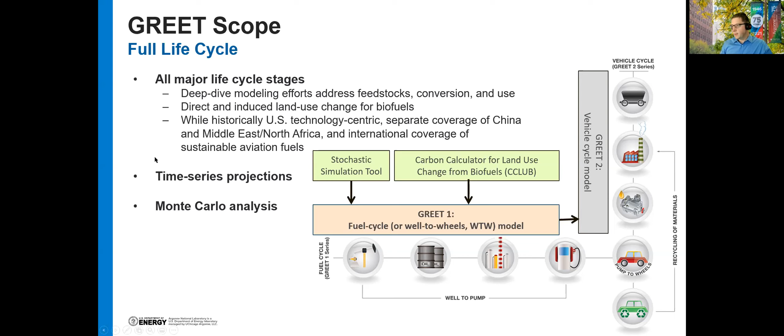I'll also say, I believe in all of these sectors, we're active looking at both fuel technologies as well as fuel cells and battery electric technologies.

This slide focuses on the metrics that are tracked in GREET. So we have four main areas: greenhouse gases, criteria air pollutants, energy use, and water consumption. And within each of those, you can see the individual flows that are tracked. I think many people will be familiar with these.

We characterize greenhouse gas emissions using global warming potential, which is established by the Intergovernmental Panel on Climate Change in their AR5 report. For criteria air pollutant emissions, the exposure matters, and so we track and distinguish between urban and non-urban emissions.

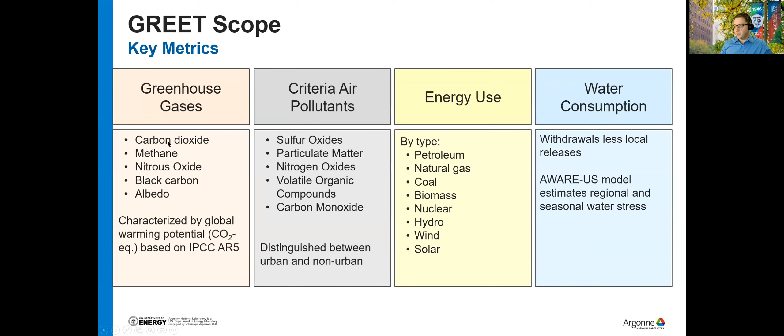Now, just a few words about the impact of GREET. GREET has a large, global, and diverse user base. You can see on the upper left here the registered users, and at this point we have over 50,000 registered users of GREET. And as you can see, this continues to increase.

The distribution of those users, we have globally, most of those are in North America, but significant numbers of users in Asia, Europe, and then other regions, which you can see there. And then you can see we have about half of our users are from academia and education, and the other half of users are from across industry, research institutions, government agencies, private consulting, and nonprofit groups.

And then the logos here show a group of various sponsors and users of the GREET model. This isn't fully inclusive, but just to give a flavor of some of the different organizations that are involved in our work.

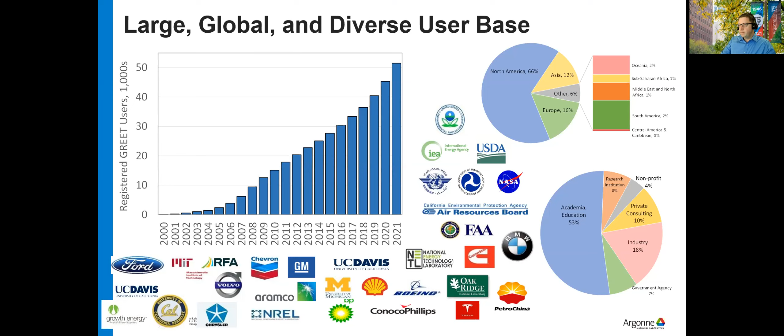One of the things that we take a lot of pride in is that GREET is used to inform policies and regulation. One of the most significant uses of GREET is California GREET, which is an adaptation of Argonne's GREET model by the state of California for use in its low carbon fuels standard for the evaluation of the carbon intensity of fuels evaluated under that standard.

Other states also have similar programs, Oregon and Washington, and they also use adaptations of Argonne's GREET model for their evaluations, following what California does.

The U.S. Environmental Protection Agency uses GREET together with other sources for its renewable fuel standard pathway evaluations. We recently contributed to the biofuels report to Congress through the EPA.

The National Highway Traffic Safety Administration is using GREET for fuel economy regulation. You'll hear more later in the presentation about our use of GREET to support the Federal Aviation Administration and the International Civil Aviation Organization to evaluate aviation fuel pathways.

GREET was used to produce the Well to Wheels report for the U.S. Drive initiative. It's being used by the U.S. Maritime Administration, first for looking at low sulfur alternatives, biofuels as low sulfur alternatives, now focusing more on IMO greenhouse gas intensity regulations and inland vessels.

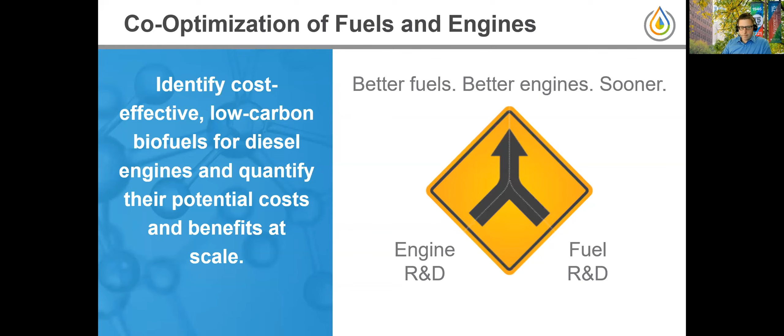Within the consortium, Argonne leads the analysis team, and the analysis team is looking at costs and benefits across scales. One of the things we're doing is looking at the cost, greenhouse gas emissions, and other environmental effects of biofuels. We've done this for light-duty vehicles and then heavy-duty vehicles. Here in the presentation today, I'll focus on our work on heavy-duty vehicles.

We've looked at the value that diesel-like biofuels could provide the refining industry by analyzing integrating bio blend stocks into refinery operations, and doing that both from an economic and environmental perspective. We've also looked at...

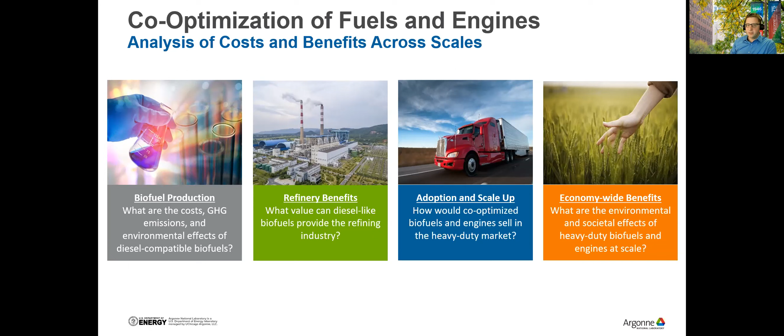consumer preferences and choice of purchasing co-optimized engines and biofuels using adoption modeling and scale-up modeling. So we've used a series of different models at the National Renewable Energy Lab and Argonne for that work. And then ultimately looking at the economy-wide benefits in terms of environmental benefits, economic benefits, job benefits of biofuels at scale.

So here's one of our outputs from the life cycle analysis and techno-economic analysis portion of the work. Here it was Argonne primarily doing the life cycle analysis, and the National Renewable Energy Lab and the Pacific Northwest National Lab doing the techno-economic analysis.

On the screen you can see the figure on the left is the life cycle greenhouse gas emissions for the fuels that we analyzed, and the figure on the right is the minimum fuel selling price, or the result of the techno-economic analysis.

You can see the list of bio blend stocks on the left, and you can see we analyzed a large number of different molecules that could be used as fuel additives. These are meant to be performance enhancing. They should reduce the NOx and PM emissions from heavy-duty vehicles, which is a major concern for meeting future more stringent emissions regulations.

These were screening level assessments, and that's the reason why we've left the numeric results off for the minimum fuel selling price, rather to show a range. But here you can see the contributions to each of these.

What we see is that many of the experimental researchers going into this program had the perception that any biofuel would be low greenhouse gas emissions. And it turns out that's not necessarily the case. There was a lot of interaction between members of the research team to down-select the key fuels, but this is shown in these results that show a wide range of greenhouse gas emissions across these fuels.

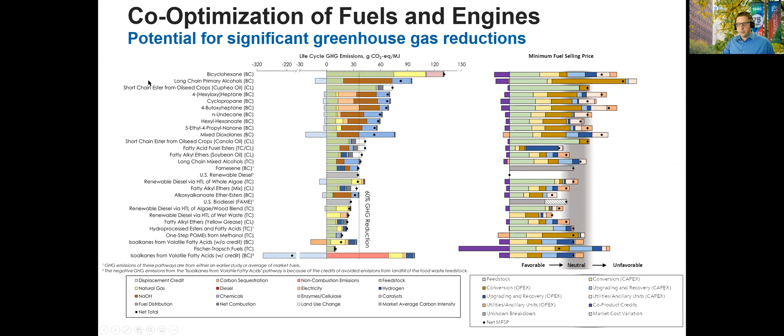And a key challenge is reducing the cost. You can see even across the whole range, we have a range of costs. But generally, good news is that the lower greenhouse gas emission fuels, some of them tend to be the lower cost options as well.

All right, next here I'm going to move into another area of our work. This project is one that we have with four national labs: Argonne, Oak Ridge National Lab, Pacific Northwest National Lab, and the National Renewable Energy Lab. This is looking at opportunities for biofuels for maritime shipping.

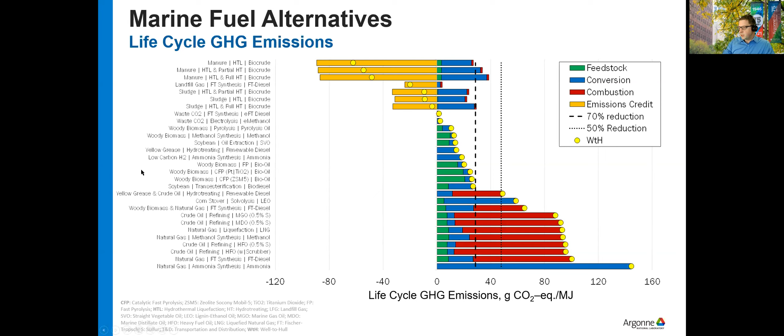A caveat here is we haven't - there's ideas to use carbon capture, but the challenge with the fossil fuels is that the carbon that's emitted is contributing to global warming potential.

One more slide here on marine fuel pathways. So this slide, we've looked at the greenhouse gas emissions and the minimum fuel selling price together. And just, in the interest of time, I'll go real quickly. The different colors here represent different pathways for producing these fuels.

And we can see that the black is the fossil pathways, and the lower end of the cost for the black dots are - we can see low sulfur fuel oil, LSFO. So that's kind of the benchmark, at 1 and 1 for these ratios.

And so anything to the left of that, all of the fuels are to the left of that, they have lower greenhouse gas emissions. And then anything below that has a lower price. So we do see HTL of manure and sludge potentially could have a lower price. And then we see other biofuels and waste-based fuels that could have lower greenhouse gas emissions with an additional cost.

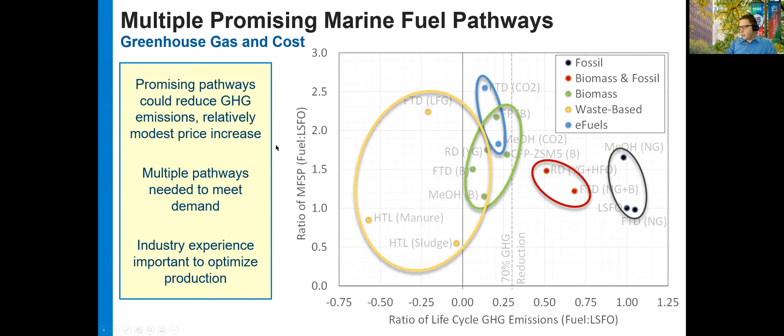And the feedstocks that are used to produce these fuels are limited, so multiple pathways would be needed to meet the total demand. And as these things scale up and we gain industry experience, we expect that production can become more optimized and these prices would then fall.

The last area I'm going to talk about here is our AWARE US model. And this is addressing the question: how can we maintain water sustainability while scaling up energy production?

So we used a method that was actually first developed elsewhere and adapted it for our purposes in the US by developing characterization factors for county level water impact analysis. We started this work by developing county level factors, and then you can see the map changing here. We realized that throughout the year, the water stress would change, so we developed those on a monthly basis and then used those to analyze different systems.

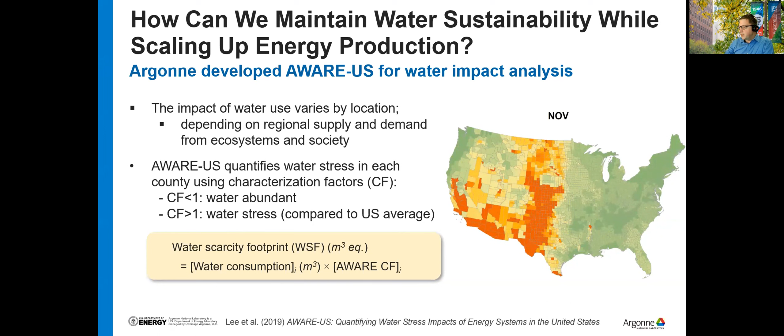The one I'll talk about today is algae. So I'll go to the next slide here. We're using AWARE US to guide development of algal biofuel systems.

This grew out of our analysis of water consumption, and we realized that wasn't sufficient because of these regional differences in water stress. So you can see here, this was looking at where would be suitable locations for siting algal biofuel systems.

And some of the background is that the southern US is more suitable. It has more sun and warmer weather. You don't lose productivity in the winter months as much as you would further north.

But you have some regions with extreme water stress, and you can see the color coding there. The red counties are those with much higher water stress, and there's a number of those in Arizona, Texas, New Mexico, which could otherwise be very suitable locations for algae production. But because of the high evaporation of water from algae ponds, those could end up causing significant water stress.

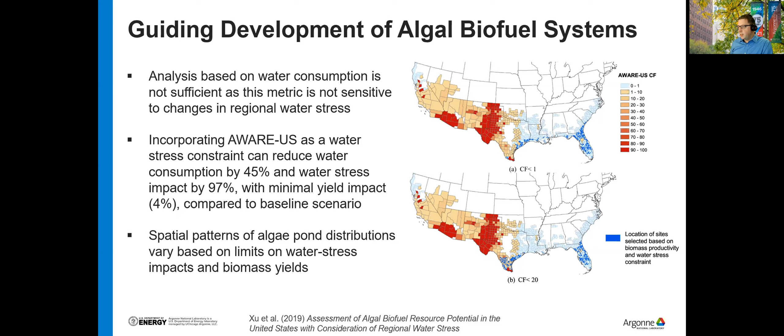Let me go to the next slide. The last thing I'll talk about here: algae ponds require a CO2 source, and the system we're looking at has an industrial CO2 source. That could be something like coal power, but it could also be high purity CO2 sources, such as those from steam methane reforming, ammonia production, or ethanol production, which produce CO2 at a very high concentration that can be compressed and delivered to the pond almost directly without cleanup and at a much lower cost.

So here we looked at algae production in different states, focusing on the differences in high purity CO2 availability. The Gulf Coast in Louisiana, the industrial center there, has a lot of ammonia production and a lot of steam methane reforming, so there's a lot of high purity CO2 which could be used to produce algae, and that would happen at a very low carbon intensity.

As you can see in these figures, the most favorable algae production location that we found would be Florida, apart from the lack of high purity CO2 available there. So considering the availability of high purity CO2, Louisiana and the Texas Gulf Coast look very good.

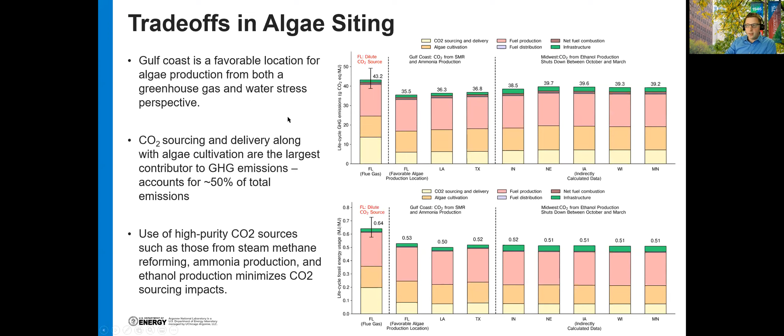So that just gives you a flavor of some of the kinds of work that we're doing. There's actually much more going on within our center, but time is limited today. So I want to turn it over to Wee-Sung next, who will spend some more time talking about our work on sustainable aviation fuels. Thank you, Troy.

So yeah, my name is Wee-Sung Lee. I work with Troy at Argonne National Labs Systems Assessment Center. So today, as Troy explained about the system boundary and what we do here at Argonne, I'd like to specifically focus on the life cycle analysis of sustainable aviation fuels, which is a very hot topic in this area. So I'd like to give you a brief introduction about this area.

So greenhouse gas emissions became a very important metric in the aviation sector. When I tried to search a flight from, for example, Chicago to Houston, planning for attending this webinar, I searched it through Google Flights based on my time availability and the price. Now you may see there's one more section: the GHG emission, presented here in terms of kilograms of CO2 for each option.

So as you may see there, some options may have lower emissions and some higher emissions. So there are many options that we can choose. In this example, you may see the higher emissions, but there will also be low carbon emission options too. So it's not only about the price or the time anymore—now people consider the emission as one of the metrics in choosing their flights.

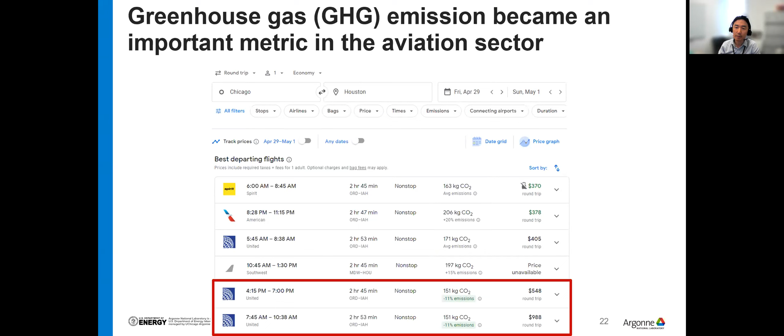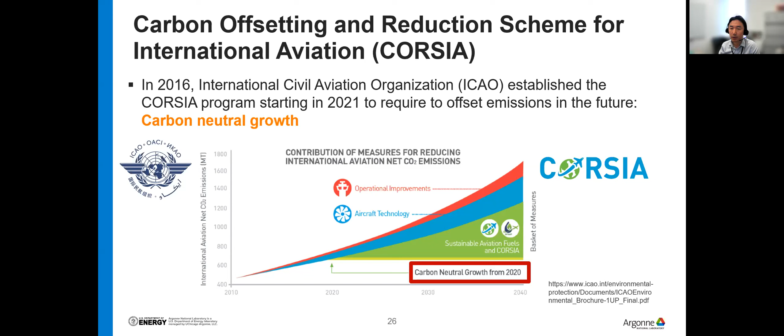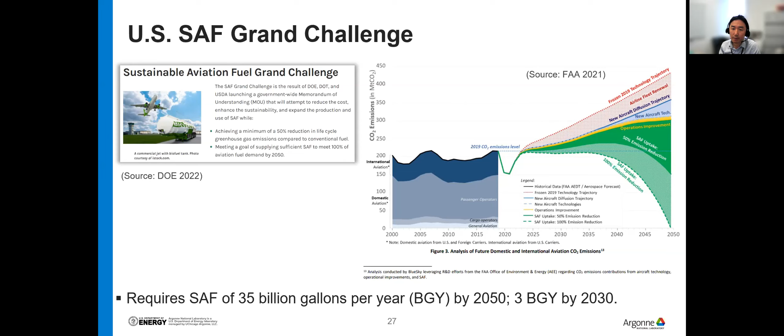I mentioned emission reduction, and LCA would be a major part of the emission reduction calculation. You may assume that if I burn fossil fuels or biofuels like SAF, the emission would be similar from the aircraft. But life cycle analysis considers the difference between fossil LCA and SAF LCA in terms of the system boundary. Biofuels like SAF can have emission reduction benefits because we consider the life cycle basis.

SAF programs internationally, federally, or at the state level take LCA as the key tool to evaluate emissions and emission reductions through sustainable aviation fuel. The international ICAO's CORSIA uses LCA, and at the federal level, US EPA's RFS Renewable Fuel Standard uses LCA. Other states like California, Oregon, and Washington also have programs supporting biofuel or SAF activities through LCA. So life cycle analysis will be the key factor in analyzing greenhouse gas emissions and emission reductions compared to fossil fuels.

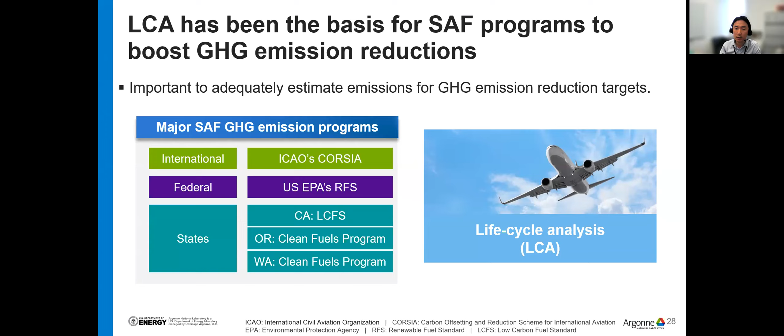So I will talk about the little more details, how we analyze the emissions of the petroleum fuels and how we analyze the emissions from the sustainable aviation fuels. LCA, Troy explained the general LCA framework. We have the fuel cycle and the vehicle cycle. But for the aviation sector, we mainly focus on the fuel cycle, meaning for the petroleum fuels, not just about the jet fuel combustion from the aircraft, we also consider the other life cycle stages starting from the crude oil production. On the far left-hand side, you will see the crude oil will be recovered and transported, and we have the refineries to convert the crude oil into the jet fuel and other fuel types, and we eventually combust it. So from all stages, we have emissions, and those are all combined together in terms of gram of CO2 per megajoule of fuels.

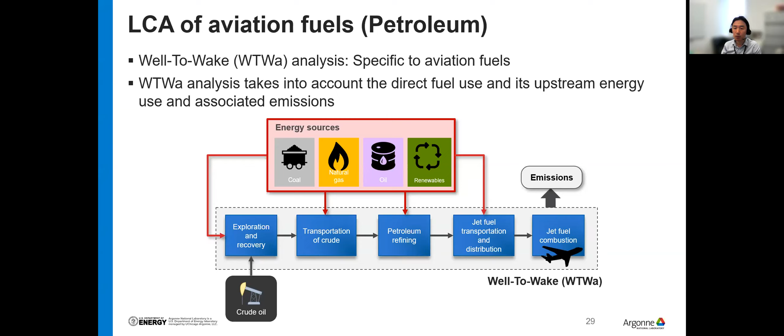We not only focus on the emissions from each stage, we also consider, for example, if I use natural gas for petroleum refining, then I also track all the way to the natural gas production and natural gas transmission to the petroleum refining process, so that all the life cycle stages of the input materials will also be covered. So it's a very comprehensive and thorough analysis. Everything will be calculated in terms of the gram of CO2 per megajoule, so that different systems could be compared to each other.

Similarly, when we consider the sustainable aviation fuels, we have the emissions from the fuel use on the far right-hand side. The aviation sector may have emissions from the combustion. We also considered all the conversion processes. This example is soybean to SAF, through the hydro processing, which is typically called HEFA processing after oil extraction.

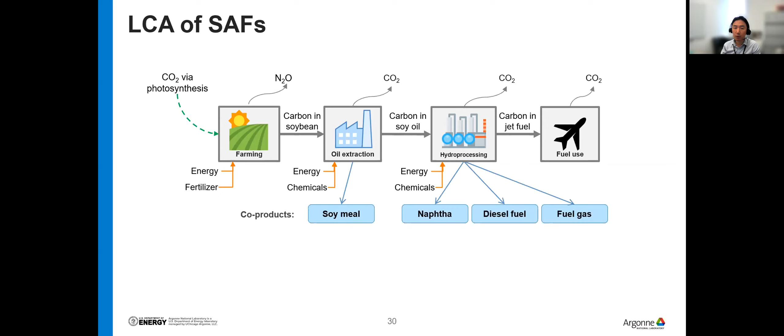But at the very left-hand side, from the beginning, we consider the soybean farming. We start from the farming, and then farming requires energy and fertilizer, the chemicals. Once we use, for example, nitrogen fertilizer for soybean farming, we also track back how the fertilizer will be produced. And if we use diesel fuel for farming, then we track back how much energy and emissions will be associated with that amount of diesel used in the farming. So again, we consider all the life cycle stages to calculate everything in terms of the gram of CO2 per megajoule.

But the main factor in SAF is the carbon cycle via photosynthesis. The carbon in soybean and carbon in soybean derived fuels actually came from the CO2 from the atmosphere. So the carbon absorbed from the atmosphere during the biomass growth could offset the carbon emitted during the fuel combustion, because the carbon comes from the atmosphere. So it's carbon neutral. That's why sustainable aviation fuel typically has relatively lower carbon emissions compared to fossil fuels.

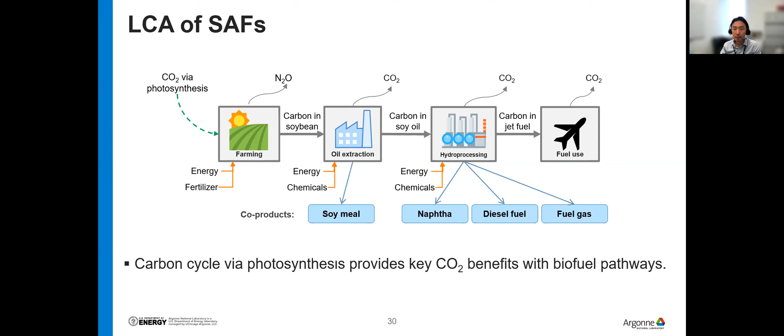So GREET provided the carbon intensity values. The carbon intensity is another term for the same thing, the life cycle greenhouse gas emissions. The carbon intensity tends to be presented in terms of the gram of CO2 per megajoule. Argonne participated in ICAO's fuel task group, where we developed the carbon intensity values for the CORSIA program. As you may see on the left-hand side, there are many fuel production options from various feedstocks like agricultural residue or forestry residue with FT, that's the fuel conversion process.

Or we can use a different fuel conversion using a different feedstock, like the second one would be tallow or used cooking oil converted into SAF using the HEFA process, for example. Argonne supported ICAO's CORSIA using Argonne's GREET model, and the default LCA values will be available in the CORSIA document. On the left-hand side figure, there's a red dashed line, that's the petroleum jet fuel baseline, which is 89 grams of CO2 per megajoule. So LCA value of the petroleum jet fuel is 89, and other SAF production options, as you may see, some may be very close to zero, like 7 or 8, and some may be higher, but those are relatively lower than the petroleum jet fuel baseline, meaning the difference between the fossil and the SAF would be considered the emission reduction, which could be a major part for the CORSIA program.

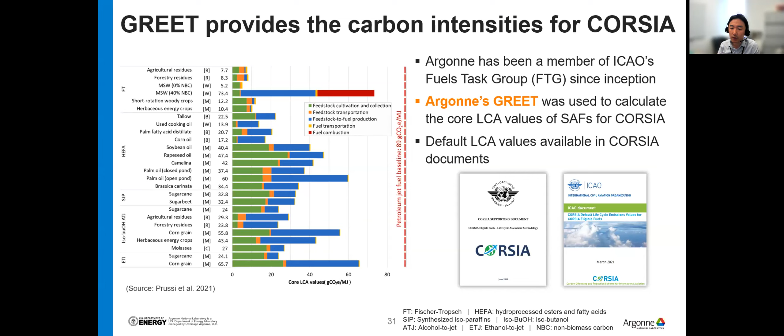I mentioned about the GREET model, and we have the GREET, like the very large file with a lot of data sets and with extensive pathway list of the pathways. We recently split the aviation part to give a more interactive, user-friendly interface so that people can test multiple feedstock and conversion pathways.

They can see the results right away. I can just show you a quick overview of this module so that if you're interested in checking the results, you don't need to understand all the details, but you can quickly check the results.

On the left-hand side, you may be able to select the feedstock and conversion types and the data sources. Then the table on the right-hand side shows all the inputs used for this calculation.

You may use the user-defined values, or if you change the numbers, the results will be updated right away. So it's an interactive module. In LCA, co-product handling is very important, and we also have this feature here.

On the right-hand side, you will see many environmental metrics, like energy use or greenhouse gas emissions, and the results are presented for the upstream and on-site emissions, with each contribution shown on the right-hand side.

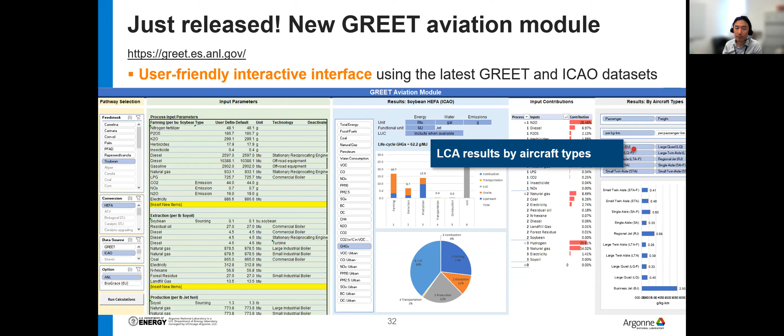The benefit of having this module is that we can have a very consistent data structure, and again, it's very user-friendly. Whoever wants to check can see the results and the impact of changing parameters right away. Most importantly, we use very reliable data, mainly two sources, GREET and the ICAO CORSIA program. This module can be used by stakeholders or other researchers to verify and improve their carbon intensity values.

So meaning if I have carbon intensity values with a 50% reduction compared to fossil, but if I want to reduce further, they can change their parameters to reflect the additional emission reductions.

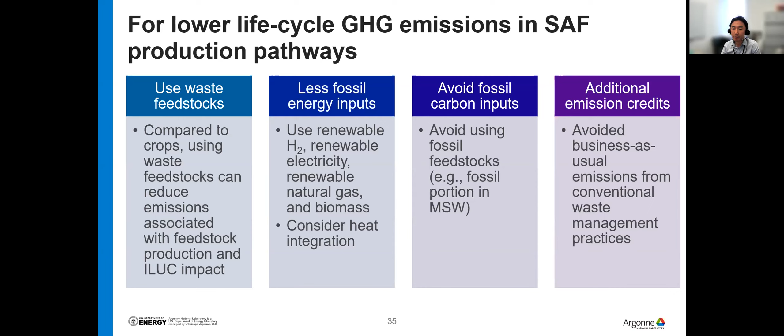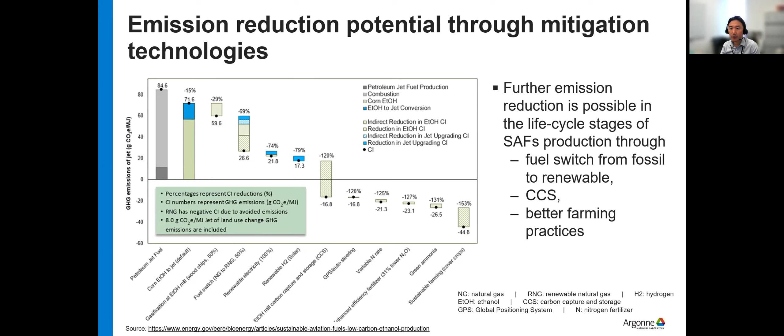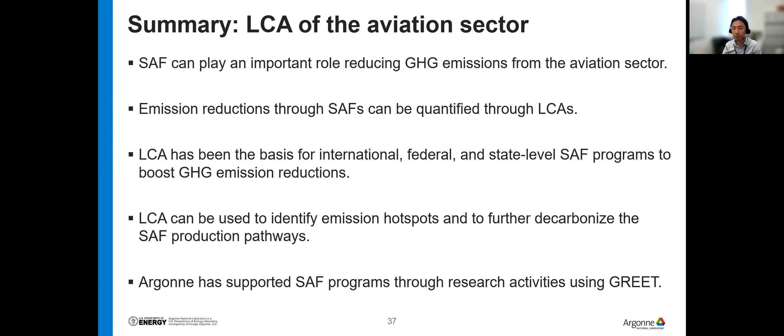Hi, thanks. I'm Jarod Kelly. Today I'll be shifting gears a little bit, moving away from fuels and into the battery space. I'll be talking about the impacts of battery electric vehicles, with a little bit of discussion on implications for grid resilience. Next slide, please.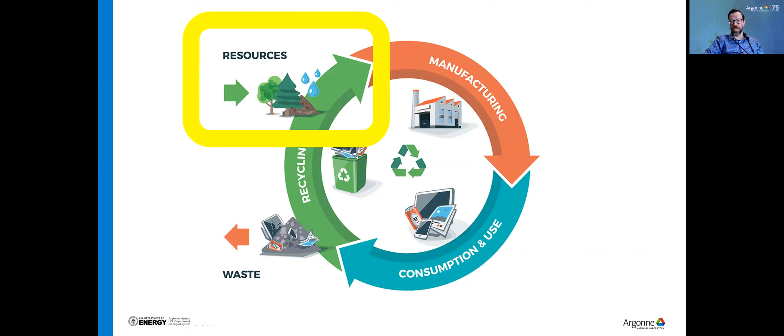To do that, we break the GREET model into two pieces, like we talked about: the GREET 1 model and the GREET 2 model. The GREET 2 model focuses on aspects of vehicle production, all the stages of producing a vehicle. I like to say the GREET model tells us all the energy and materials associated with producing all the energy and materials that we use. So we have raw material extraction, material processing, vehicle component production, vehicle assembly, and then we get to the end of life—that's disposal, recycling, and those stages. Next slide, please.

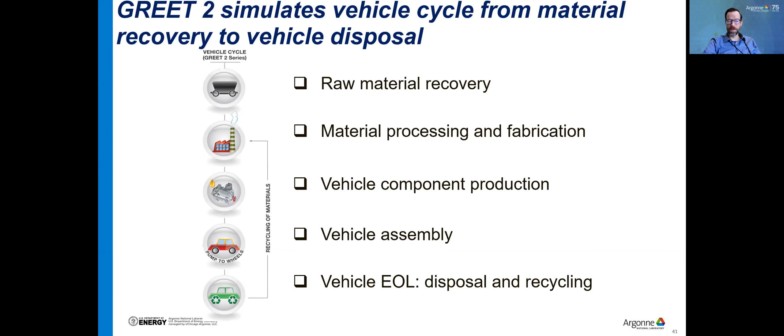We're supported by a number of different programs within the Department of Energy, which help us understand the various materials that go into vehicles. There are many different types of materials that go into vehicles, and many different types that go into batteries. So we capture all the different materials, what they're made of, and what's associated with producing them. That gives us an idea of the supply chain impacts associated with material production. We carry that forward into battery component and battery pack modeling.

That includes things like chemistry, processes, bill of materials, lifetime, and location, which helps us understand the supply chain impacts associated with battery production. We carry that forward into electric vehicle modeling, where we have the vehicle characteristics, usage rates, and cradle to grave—that's what we mean by C to G—possible second life, and possible end of life impacts. That gives us a total perspective of electric vehicle use, production, and end of life. Next slide, please.

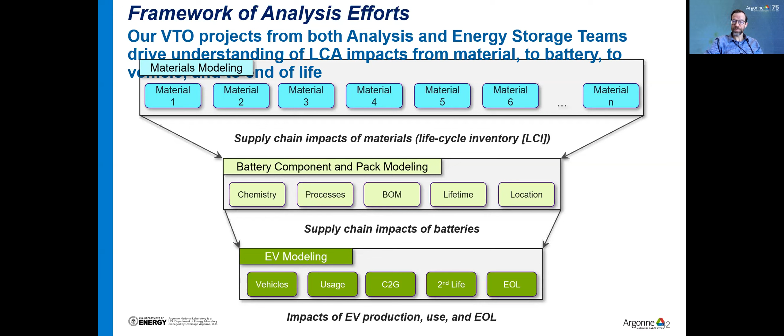So if we drill down on just one material here, we have this effort from most of the materials within the GREET model that we cover. Drilling down onto just the LCA inventory analysis associated with production of lithium, we have lithium from a couple different assets. We can think of brine-based lithium coming out of South America, or lithium from an ore process, spodumene, coming out of Australia. We go from material recovery, concentration, transport stages, conversion to lithium chemicals, lithium carbonate, lithium hydroxide, additional transport stages towards cell production.

So the battery is comprised of a cell, and we should actually have a cathode stage here as well. There should be a cathode production stage prior to cell production. And then we have cell production, transport, module production, potentially transport, pack production, potentially transport, et cetera, until it gets into the electric vehicle itself and is used.

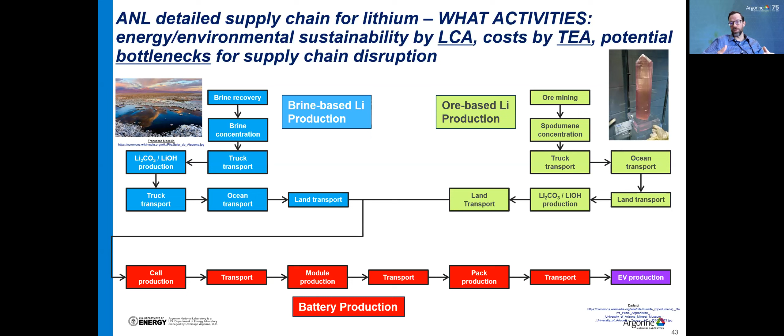So the battery electric vehicle contains a battery, and that battery is comprised of many different materials. This is just showing us what the battery looks like. We can see there's an anode current collector and a cathode current collector, which are going to be your copper and aluminum. Then we have the anode itself, typically graphite with a binder, which can also have silicon doping or silicon components, potentially lithium metal for future considerations. There's a separator, and then there's the cathode material.

The cathode material is what a lot of folks are considering at this point in time. That's going to be your LFP, lithium iron phosphate, your NMC, lithium nickel manganese cobalt cathodes, and your NCA. NCA is typically what Tesla is mostly using in their vehicles, but they are putting LFP in different vehicles in different parts of the world.

So there's a lot of different components associated with the battery, and a lot of different materials that go into those components. We cover all of that. We try to be exhaustive as best as possible, and we consider those here. Next slide, please.

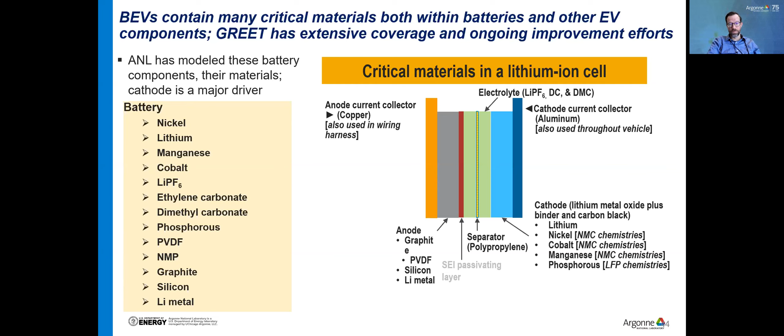So the next stage that we would think about then is manufacturing, making the battery itself. Next slide.

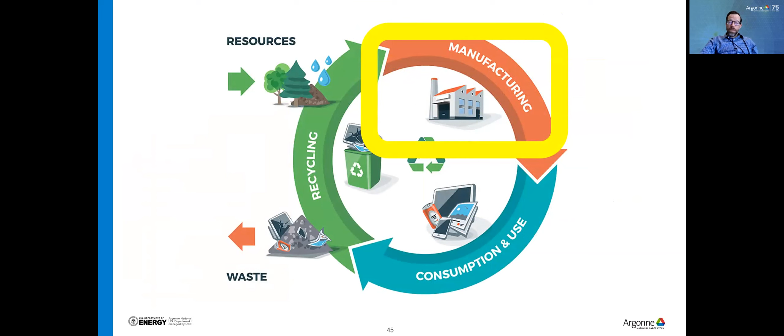For that kind of coverage, I was talking about what a battery is made of, but there's also, in addition to all these different materials and stages of production, the assembly stage. The assembly stage is energetically intensive because you basically have to have dry room conditions, and that means it doesn't scale linearly. So the more modules or battery cells you can produce in one location, the better. It's basically a big capital expense if you think about it that way.

And we carry this through also to stages of recycling and disposal, as we can see here. A couple of different recycling stages considered: pyrometallurgical, hydrometallurgical, and direct. I'll talk about those a little bit later. But this is showing the comprehensive coverage that this model has, and it's informed by another Argonne model called BatPac, which is focused on modeling the characteristics of different batteries. So that's how we inform all of our modeling, informed by the other good models at Argonne and other information we can find elsewhere.

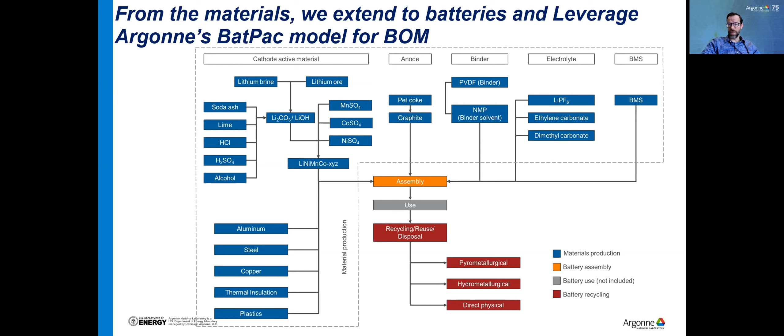Next slide, please. There seems to be a fair amount of complications with merging our different slides together.

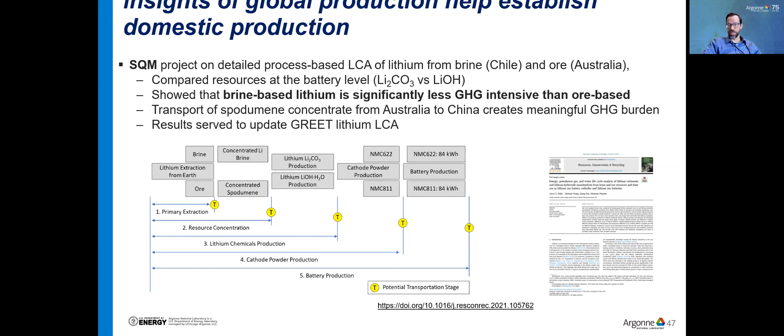So when we think about these different batteries, one of the things I mentioned was we have different cathodes. Cathodes are where a lot of the activity is occurring in trying to change battery density. Obviously energy density is really important because that allows you to basically extend your range for the same weight of material or weight of a battery.

So what this is showing is the bill of materials associated with the NMC variants. For those unfamiliar, this is stoichiometric relationships of nickel to manganese to cobalt. Typically we say NMC 111, 532, 622, and the numbers correlate in XYZ form to the N, the M, and the C respectively. NMC is one of the dominant chemistries on the market, so it's of great interest to folks.

So what we're showing here is essentially that as you maintain a particular energetic capacity, I believe this is for an 84 kilowatt hour battery, you see the associated weight of that battery broken down by different components, and you can see that it's lighter as you get more energy dense, which makes sense, I think, to probably everyone on the call. Next slide, please.

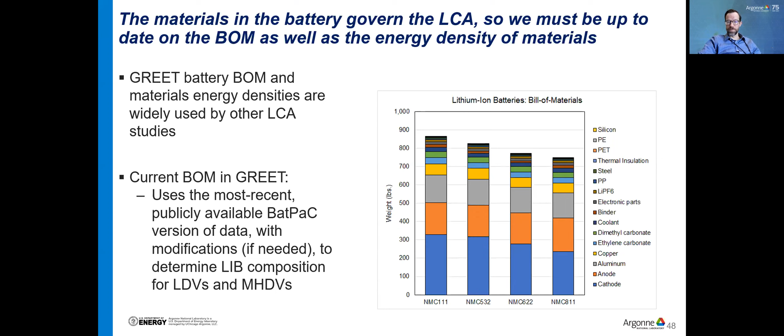One of the things we look at and are concerned about is supply chains. What does it look like if you extract these different materials from different parts of the world? Here we're showing a comparison of these different battery chemistries along with where the primary production locations would be occurring for these different materials from a greenhouse gas perspective.

If we focus on one of the blocks, the NMC 811 to the far right, looking at the US, China, Japan, Korea, and Europe, you can see that Europe in particular has the lowest greenhouse gas emissions associated with the production of the battery, followed by the US, and then Korea, Japan, and China, respectively.

That's related to a large degree to the electricity grids associated with these regions. So as we move from the NMC 111 over to the 811, as you increase energy density, you decrease greenhouse gas emissions associated with the battery generally. And then there's variance in where you produce the batteries themselves.

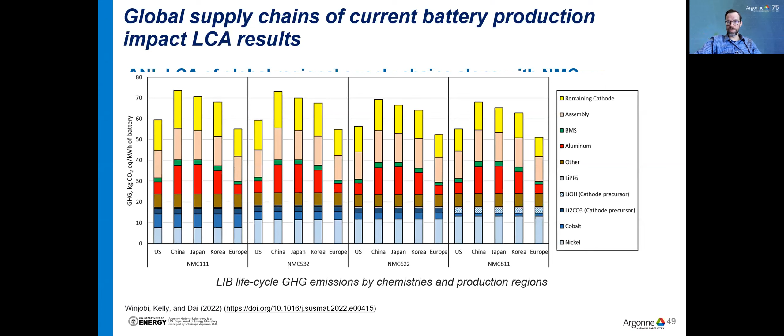Now, consumption and use.

Obviously, Troy and Yusung talked quite a bit about the upstream and the implications of producing fuels from different pathways. The same can be said for electricity. This is just an illustration of all the background information that we have on the electricity going into the grid.

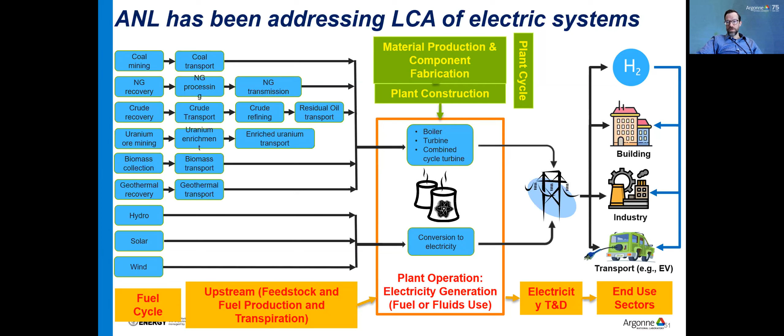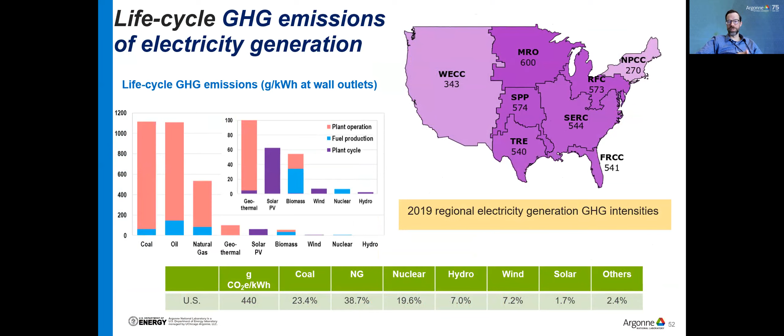This is a map of the characteristic emissions rate, greenhouse gas emissions, in different parts of the US. This is for 2019 data. We update all the time, so this is constantly representing better and better information.

We can take that information and bring it into an analysis of an electric vehicle versus a gasoline vehicle. To orient you on these slides, on the far left is a gasoline vehicle with 31 miles per gallon gasoline equivalent against an EV with a 300 mile range that has 124 miles per gallon gasoline equivalent. The bar for the EV on the far left uses the US average grid emissions as characteristic.

You can see there are different colors. The colors represent the vehicle in blue, the battery itself in yellow. In pink, that's the upstream emissions - the emissions associated with producing the energy, so electricity emissions go there. And then we have tailpipe emissions in the darker red - apologies, I'm a bit colorblind.

Now, as we move further to the right, I've characterized things for the electric vehicle by fuel and by region of the US - looking at coal, natural gas, and renewables, and different parts of the country: upper Midwest, Texas, California, and the Northeast. This is showing how these EVs would compare against a gasoline vehicle. These are comparable vehicles as modeled through the Autonomie simulation tool, so it should be a pretty apples to apples comparison in terms of the performance parameters.

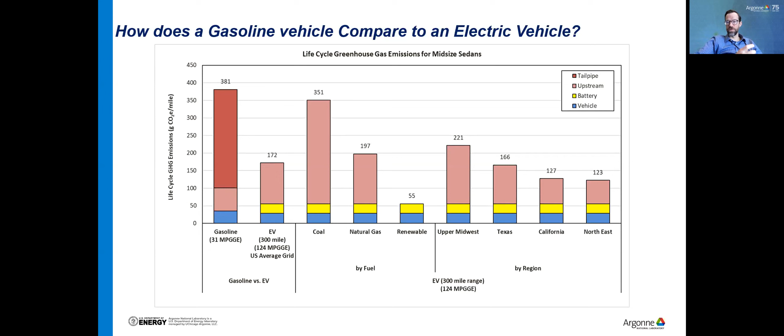So this is showing that the battery itself is a big component of the EV, right? It's a significant burden, you can see there, but that still doesn't, to a large degree, offset the benefit from the use phase.

This is looking at that in even broader context, both currently and into the future, for a variety of different vehicle types. If we focus on the plot on the right, that's showing the various current and future vehicles for gasoline, diesel, corn ethanol, hybrid vehicle, plug-in hybrid with a 50 mile range, fuel cell vehicle from different types of fuel cell, and the battery electric with 300 mile range. It's a little hard to view this one.

One thing to observe in the top portion is that we have a variety of different pathways we're considering for the future for the fuel cell vehicle and the battery electric vehicle. We're generally expecting advancements in vehicles just generally, but we can see significant potential for reductions in associated greenhouse gas emissions with vehicle electrification. Fuel cell vehicles, and even hybridization and biofuels, can yield significant greenhouse gas reductions as well.

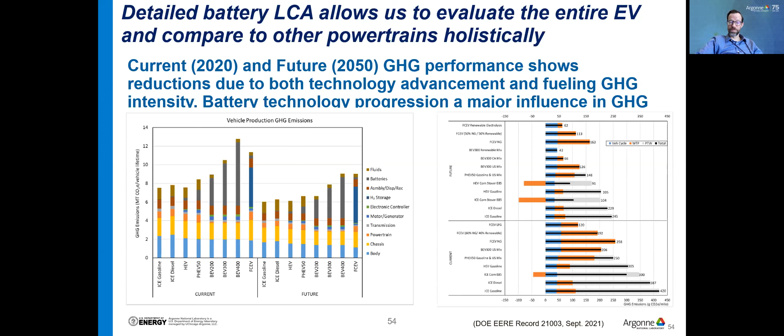So one of the conversations going on in this group, and what I was hoping to address, is—and this conversion of slides is problematic, so I'm missing some text that would be beneficial, I'll talk through it—essentially the idea that, if I'm understanding this group correctly, you're thinking about battery electric vehicles and their potential for resilience to the electrical grid, thinking about that from grid support.

It's important to recognize that charging and discharging batteries degrades them, reducing the battery's longevity. But the longevity of the battery also declines with age—there's calendar aging, so the fact that it exists means it's going to have some degradation, at least with current instantiations of these batteries. You can reduce these effects by staying within certain state of charge windows and not having extremely high charge-discharge rates—that increases longevity.

We can think of a few different types of grid support—unfortunately the text is cut here, so I'll talk through it. There's passive grid support: if your vehicle is connected to the grid and there are issues, the grid could say that's an extraneous load and not charge the vehicle. That provides support to the grid, allowing it to provide electricity to critical loads, like hospitals.

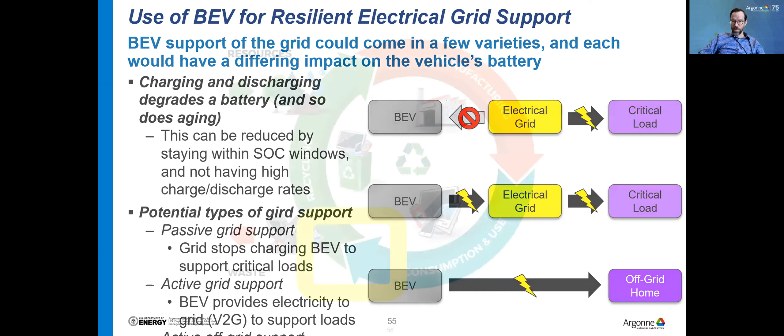So there's also, now we get to the end of life, the recycling, but there's also the transportation stage and getting it to recycling. Next slide, thanks.

This is an issue—who's responsible for these batteries at their end of life? Where do they go? Is it going to have a backhaul sort of thing like we see with lead acid batteries? Who's going to be collecting these, moving them along the life chain to get them to recycling? Next slide please, because this can be an issue.

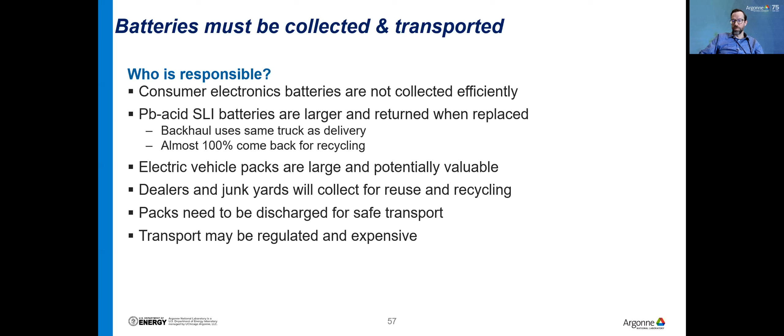So if you have certain situations where these batteries look like—is this playing for other folks? You able to play that, Troy? If these batteries are on a conveyor belt, like the small ones—obviously not the kind that go into your Tesla, but a small battery basically the same shape as the battery in your traditional vehicle—that can become a big issue. Seems like it's paused again to me.

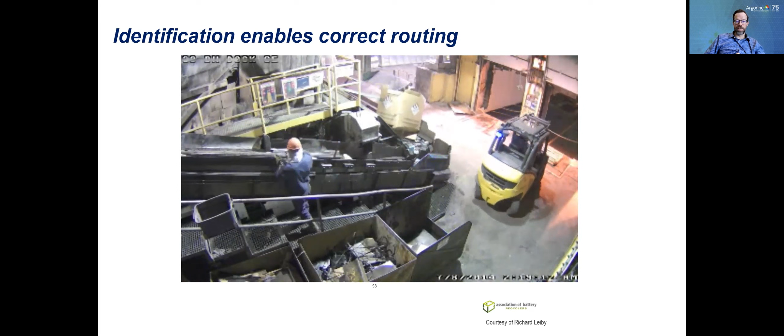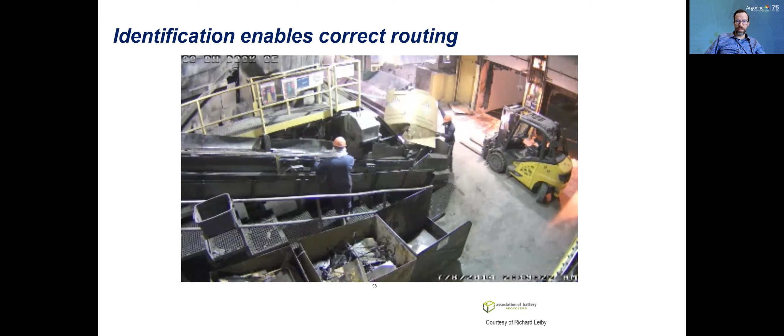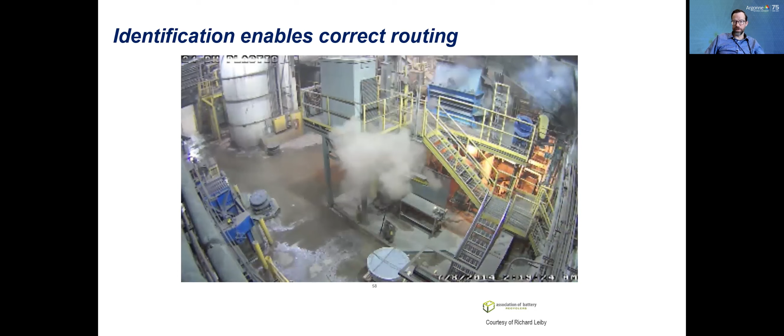This can represent an issue to worker safety. This is a video showing an instance where a lithium-ion battery has gotten onto a conveyor belt with lead acid batteries and yields a pretty dramatic result, as indicated right about here. There's significant risk associated with these batteries contaminating other battery streams. Nobody was hurt here—this is courtesy of Richard Leiby from the Association of Battery Recyclers.

So this is a concern, something that's being addressed—there are a lot of groups focusing on this kind of issue. But even simply transporting lithium-ion batteries from one place to another at their end of life represents a challenge. There needs to be efforts in that space to ensure this value chain can be retained, because there is significant value associated with these batteries at their end of life. Next slide, please.

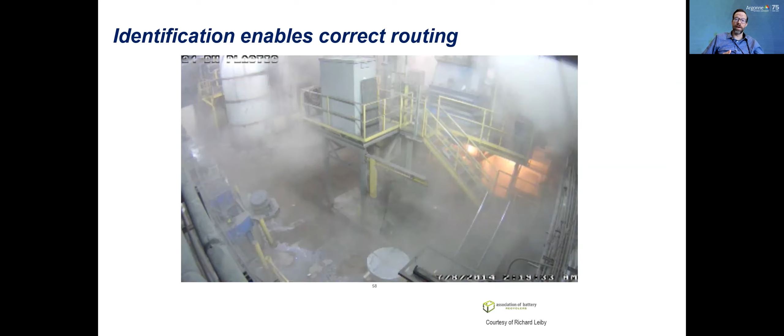And that brings me to recycling. As I was talking about, these batteries are made of cells. Those cells get rolled up essentially into modules, and those modules get brought together in packs. You don't break things down at the end of life beyond the module level.

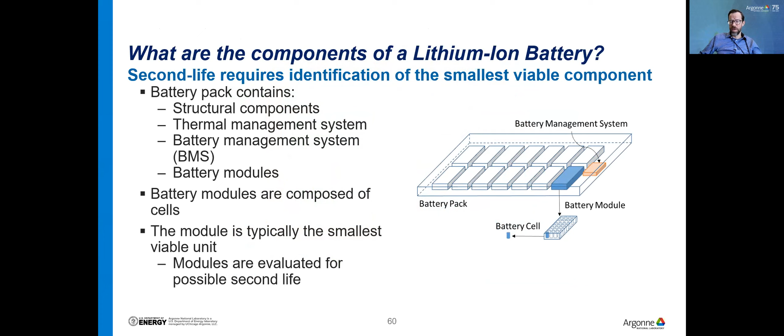When the modules are evaluated, there's dismantling, the modules get evaluated, and then they get graded into, let's say, a gold, blue, and gray category. That allows them to be routed into potentially a remanufactured battery pack, a second life application—so that might be grid support applications—or they might go to recycling. Being able to understand these stages is really important.

Especially now when we think about recycling, recycling represents opportunities, and we have models at Argonne to help us understand that. This is the EverBatt model. It represents a variety of different recycling pathways that are under investigation. There's a ReCell Center here at Argonne that is actively pursuing different approaches to recycling, in particular direct recycling—cathode recovery and relithiation potential.

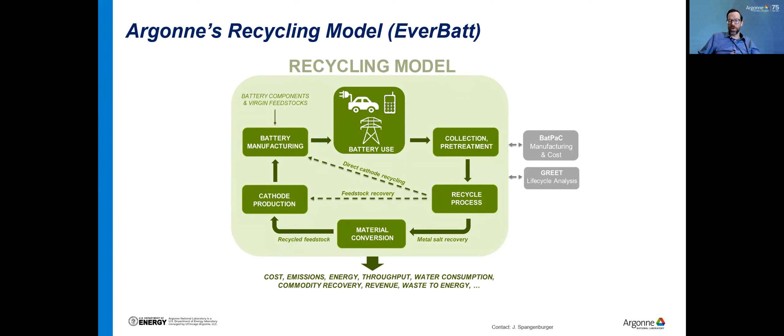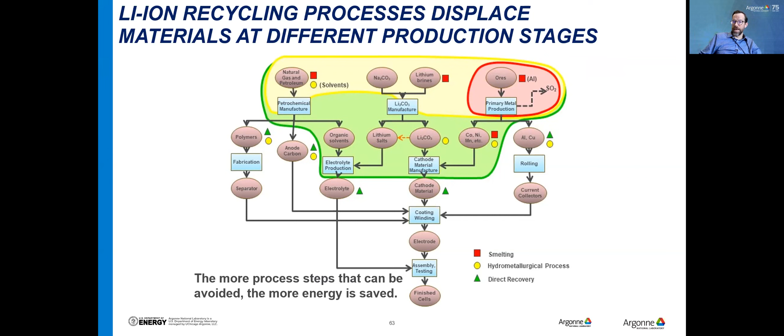I believe that's my last slide, and I think we can open it up for questions. Thank you.